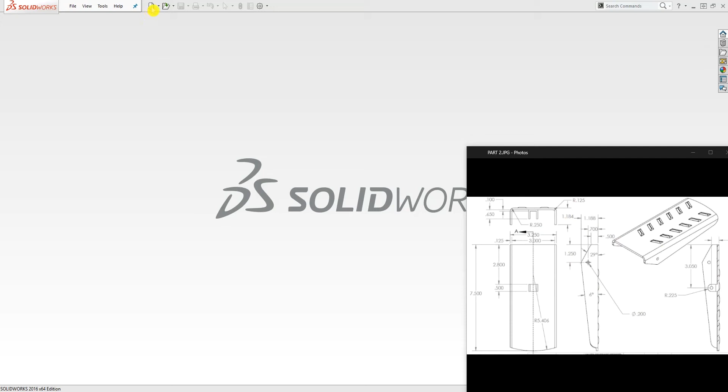Hello, welcome. In this tutorial we'll be making an assembly for a throttle pedal. Someone sent it to me to make it. This is the first part we are going to be making. The dimensions are not complete, but I'll be referencing some of these dimensions, so feel free to follow along.

Instead of modeling this the way the example I saw was done, the person modeled it in sheet metal, and we are going to be using sheet metal to model it so we can bend it and unfold it. To start, click the top plane. I'm just going to move over here. Make sure your unit is in inches, and I'll change my image quality, then click OK.

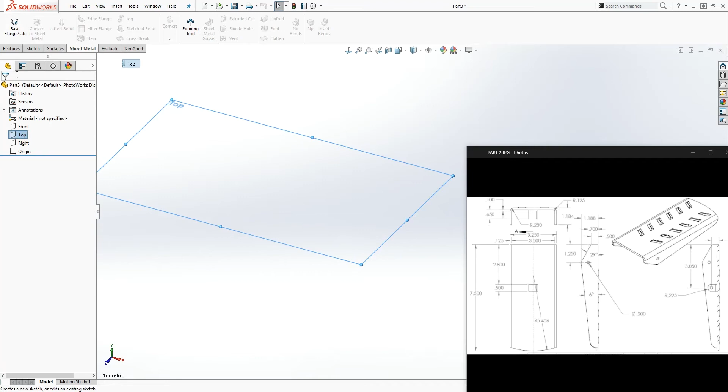On the top plane, click go on the sheet metal tab. If you don't have sheet metal, right click anywhere on the tabs and you should see sheet metal option, make sure that's checked. Select the top plane and select that first tab thing on the sheet metal, and it's going to bring you to a sketch.

So you need a sketch. Let's just draw a corner rectangle, starting up here and going right there, something like that. Then add your dimensions: the length for this is 7.5, and the dimension here is 3.25.

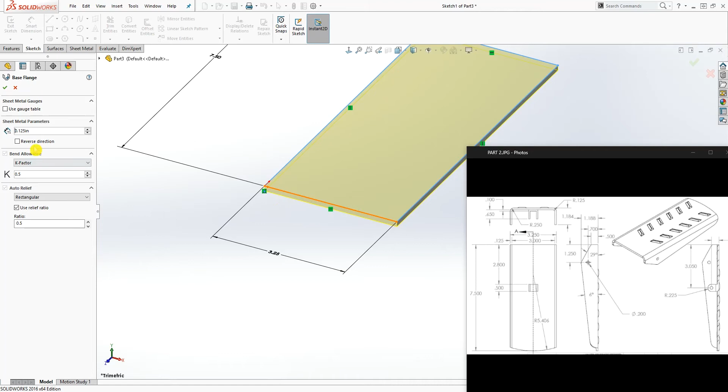Once we have that, you can exit your sketch, and it goes right into the extrude. It's trying to extrude it down, which is exactly what we want. You want it 0.125. You can leave all the other factors the same and click OK.

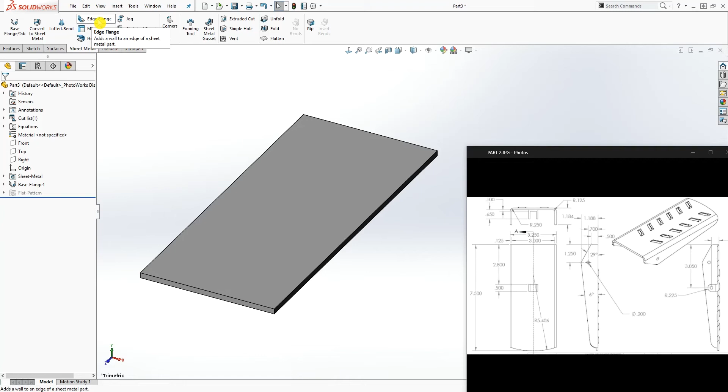Now you've extruded, and the sheet metal tab has been added to these folders. The next thing we need to do is add the edge flange. Click on edge flange, and I'm just going to click on the top face. Make sure you're on the top face - if you click this face, you can see I'm actually on the top face.

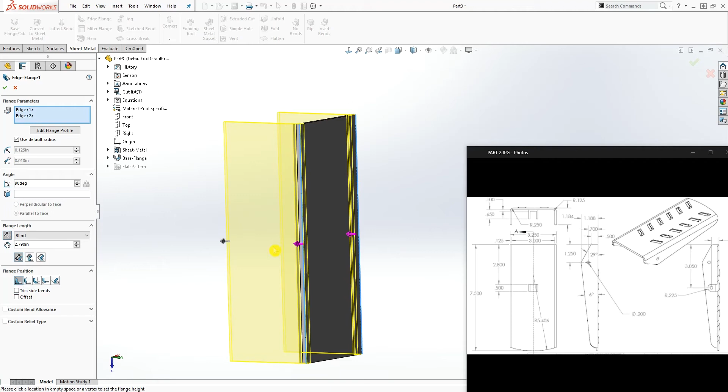Now I need to select two edges to add my flange to. In this flange parameter, select this edge, and again in that flange parameter also select this edge. So we are adding it to those two edges. This stuff is pretty sensitive - make sure you're going in this direction, and once you select the edge, click once in this direction to make sure you're going that way. As you can see, I've clicked, so I'm going in that direction.

You can also change it here, but we want to change this value - if your radius isn't 1.5, over here it's 0.125, you can uncheck this and change it, but mine is 0.125, so that's what I need. Over here, this is going to be 1.1875, that's the unit I want, 1.187. You can see that's short now. Select this first tab, select that first tab. Everything looks good, make sure this is 90, and click OK.

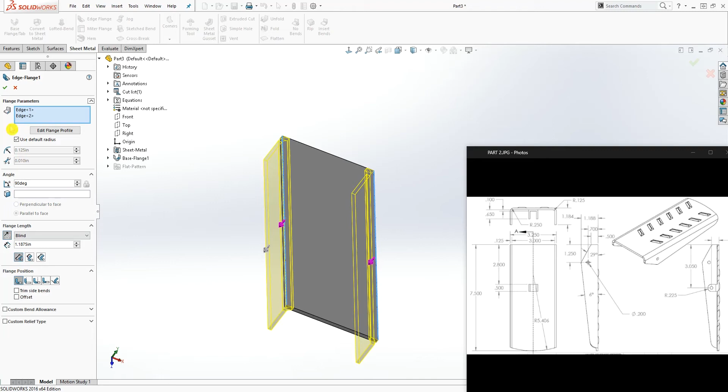Now we have that tab. We are doing this in sheet metal just to show you how to use it. If it was a normal sketch, all we need to do is draw this profile and extrude it, and we'll be done. The good thing about sheet metal is now these folders are here, and if I go down here, I can actually unfold this - you see, it turns into that, and I can also suppress it and it folds back. That's the reason why this is good.

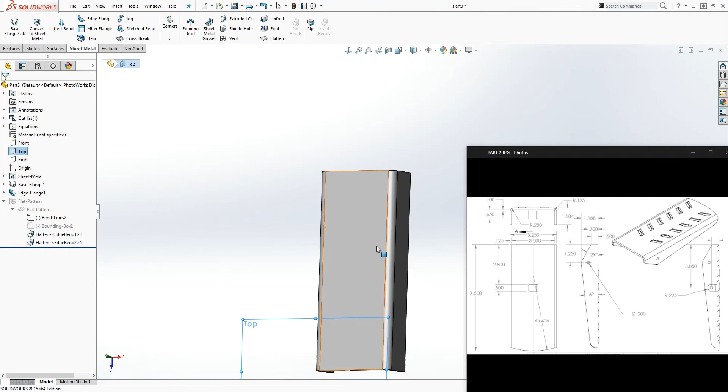Moving on, let me make sure I'm on the top plane. Yes, good, and that is going down good, so that's exactly what we want. Now all we need to do is sketch on this face. I'm just going to draw a line here and there, but let me go normal to it, so I have something like this.

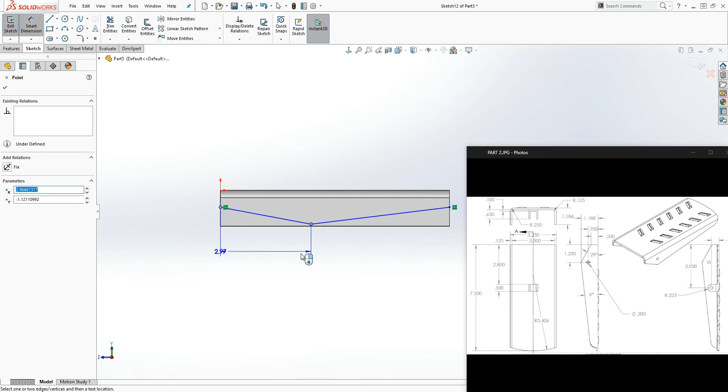Looking at this on the back side, make sure this line is coincident with that, and make sure this line is coincident with that. Now we want to add our dimensions: from here to here is 1.25, and the radius from this edge to that edge is 6, and from this edge to this edge is 0.5, and the radius here is 29.

So from here - not the radius, I mean I probably said radius for that, I mean angle, sorry - the angle is, excuse me, 29. So our sketch is fully defined. All we need to do is close it off, so you can draw a line sticking out.

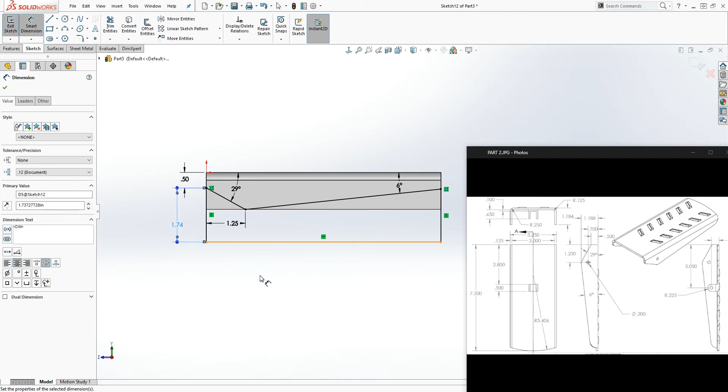So close it off, and let me move this dimension out of the way, and I'm just going to fully define my sketch because I like fully defined. Just add a dimension here to make sure everything is fully defined. Then go to the feature, extrude cut, and you want to extrude through all, and click OK.

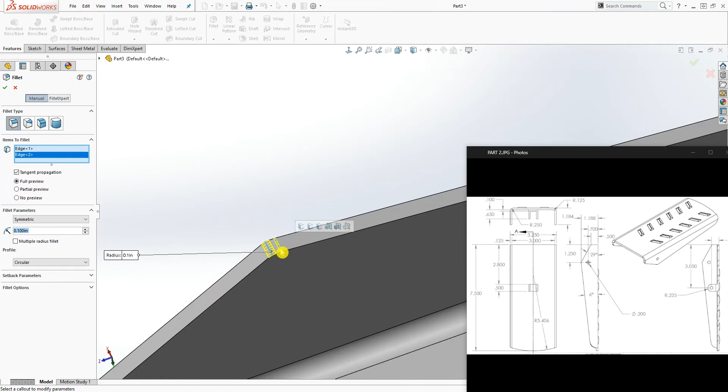Good, so now we have that feature. Now what we can do is add our fillet to this edge and that edge, and the same thing here and here. All, and the fillet is going to be 0.125,

and click OK. So good, that's done. Let me just move my stuff over here because the drawing is in the way. So again, normal to this plane. So we want to draw, cut the part out. So on this face, sketch,

go to your arc, the one I'm using is the 3-point arc. Click this side and click that side and just click up here, so you click in 3 times. Make sure this point and this point is horizontal to each other. Make sure this arc and that edge is tangent to each other.

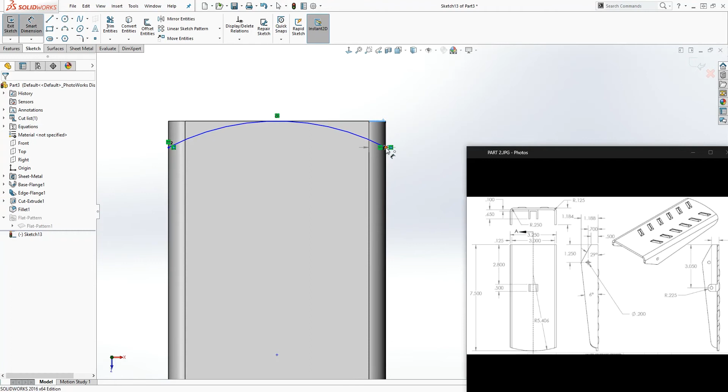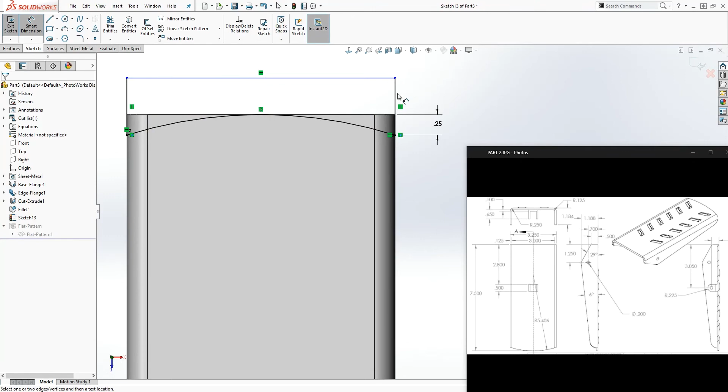So now we can add our dimensions from that point to that point. It is going to be 0.25, and our arc is actually fully defined and we don't really need a radius, so that's all you need. Again, close it off, close your sketch off, just something like that. Make sure this is vertical, and just add a dimension here so everything is fully defined.

And feature, extrude cut, and through all, and click OK. Good, so we have that done. The next thing we want to do is draw that hole in there.

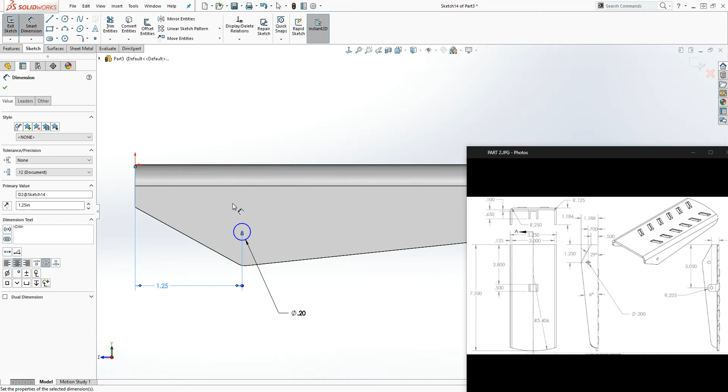So what we are going to do is click on this face, sketch, normal to, just draw a hole somewhere over here. The diameter is 0.2, and the distance is from here to that is 1.25, and the distance from here to here is also 0.5.

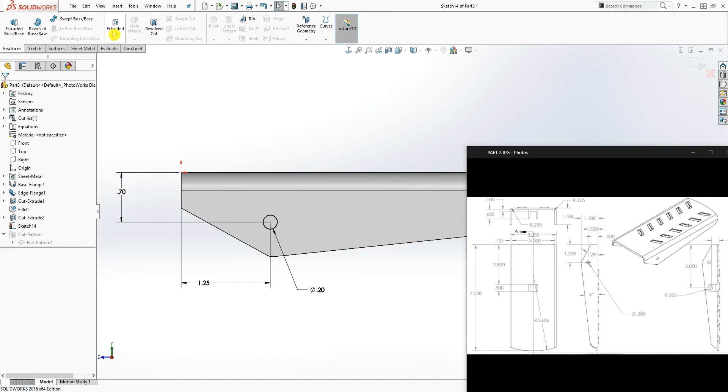So let me make sure everything, not 0.5, I'm sorry, I have it wrong, 0.7. So that is 0.7. So yes, right here 1.25 and 0.7, and feature, extrude cut, blind through all, and click OK. Good, so we have that.

So the next thing we need to do is we can add a radius over here, on this back end, and it's also going to be 0.125. I'm going to add it to this edge as well, and click OK.

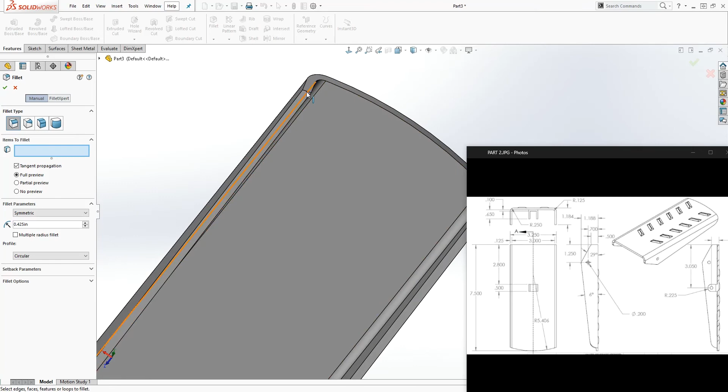And now we need another radius up here, 0.425, and I'm just going to add it to this edge and that edge, and click OK. Good, so we're almost done with this part. You see everything looks pretty good.

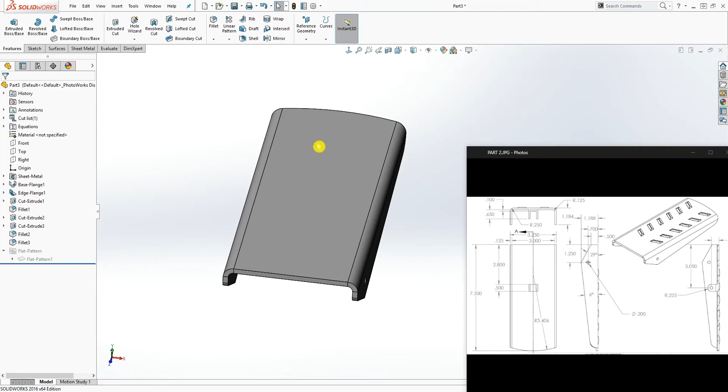So now we need a plane. We need a plane in the middle because the way we start our sketch, our plane is on this side. So one way you can draw a plane in the center is click this face and click that face, and SolidWorks automatically puts a plane in this at the center. That's what we need, and click OK. So now we have the plane in the center.

Click that plane and sketch, number 2. So we have that, and I'm just going to section this so I see what's going on. Now I want to draw, the reason why I did that is I just want to draw this profile straight. I don't want to have to draw the square and cut it. I just want to draw that profile straight.

So I'm just going to draw something like this somewhere. Make sure it's coincident with that. Draw something like that, and draw like a circle here. Make the circle tangent to those lines, and also make the circle tangent to this line. Let me uncheck that tangent.

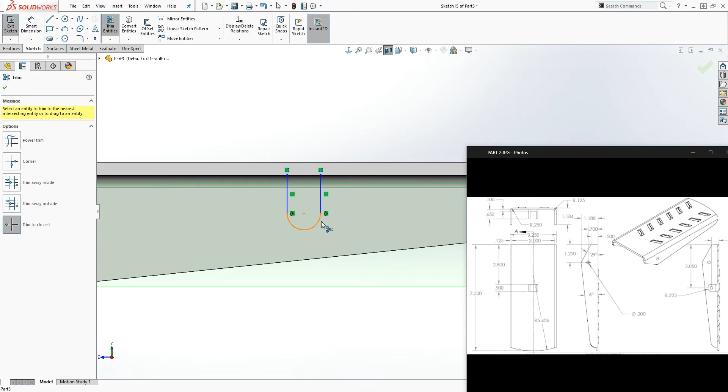Maybe I don't need this line, and I'm just going to trim this off. And the dimension from this face, so you can do the top face to the center line of that, is 5.25. Not 5.25, I'm sorry, 0.525.

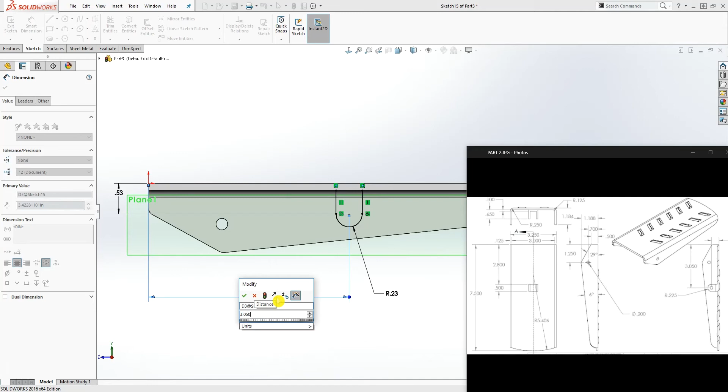I was like, wait a minute, what's going on? And the radius for this circle is 0.225. And we also need one more, so the dimension from the back side to here is 3.050. Click OK. So make sure your sketch is closed, and we are going to draw the circle inside, and the circle in it is 0.2.

Make that 0.2. Our sketch is fully defined. Exit sketch. We have something like that, and I can hide this plane for now. I'm just going to feature extrude this sketch, and I want to extrude it by the mid plane, and it is going to be 0.65.

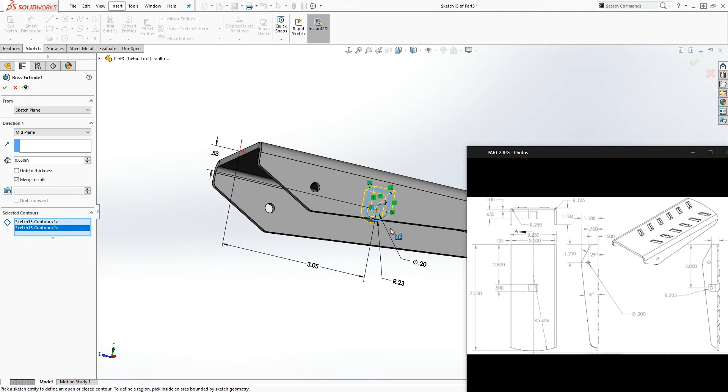If I unsection that, we have that in the middle. Click this plane again. I did that wrong, let me go back. I want to select those two. Let me edit this, and make sure this contour is also selected, and click OK. Now I have that hole in it. That's exactly what I want.

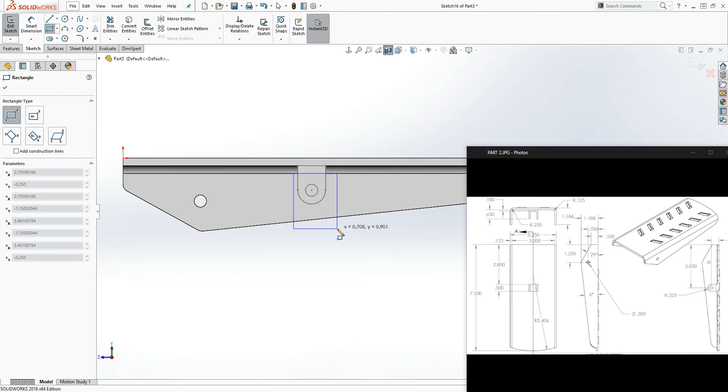Select this plane again, sketch number 2. Now I want to section it again, and I'm going to show this sketch for now, and just draw a rectangle somewhere in here, something like that. It doesn't have to be exact, just make sure it's not coincident with that tangent line, just something in there. And okay.

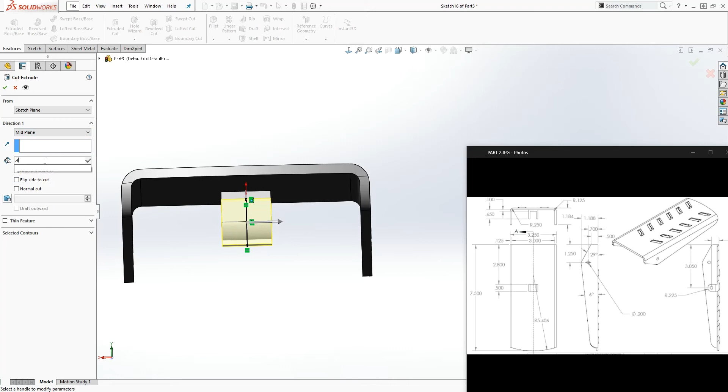Add a dimension from this line to that sketch line, going to be 0.1, and this sketch is sticking out, which is what I want. I can make it coincident with this, coincident with that, and I want it sticking out, and add a dimension here, 0.6 is good. So I have something like that sticking out, and now I want to feature extrude cut by the mid plane, and it is going to be 0.45. Something like that, click OK.

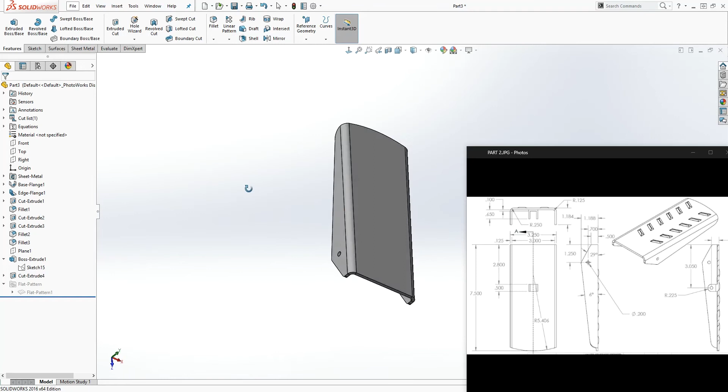Good. So we have that, and now I can just hide this sketch, and this part is pretty much almost done. The only thing we need now is those designs on the top. Click on the top face, sketch, draw just something like this for now.

Draw a center line. If you click, because this part is pretty much the same distance, that's pretty much the center line. I'm just going to draw a line over there and make it a construction line. Now add my dimension from here to here is 2. This is 15. No, it's 115.

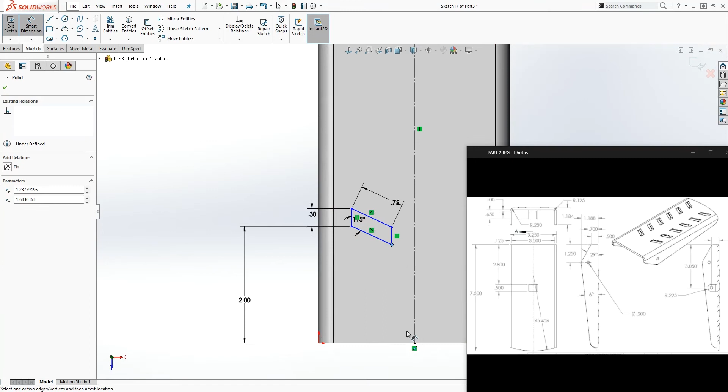This line and this line are parallel to each other, and from here the dimension for this is 0.3, and the dimension here, going this way, is 0.75. We just need to specify the distance. For now this doesn't really matter, so we can just do a dimension from here to here, and let's make it 0.38. So you should have something like that.

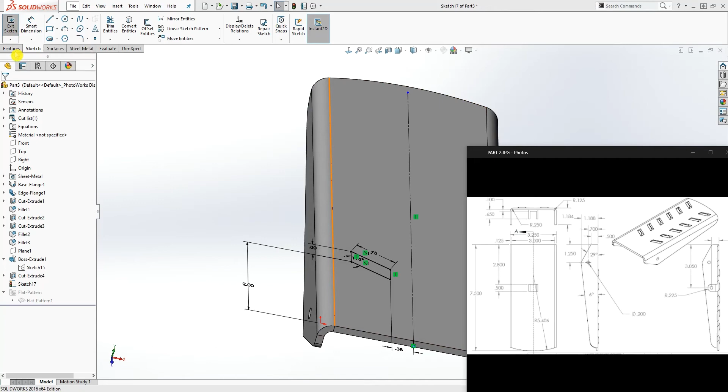Once you are done, we are going to extrude it. I'm going to exit the sketch, or even before I exit the sketch, I can just go into feature, extrude. So I'm extruding that up, and it is going to be 0.05 inches, not centimeters. Then select your draft, and this is going to be 68. If I zoom in, you should see 68, and click OK.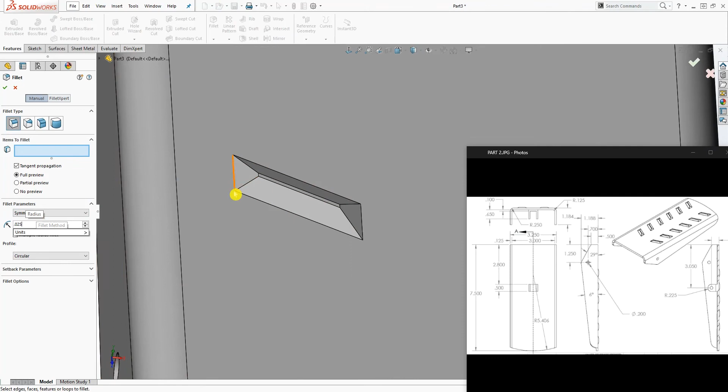And you have that pattern. The next thing we're going to do is add a fillet to it. Click on the fillet, and it's going to be 0.025. I click on that face, that face, that face, and that face. So I have my fillet. Click OK.

Good, so now all we need to do is just go number 2, add a linear pattern. For the direction, we can select this edge and flip it so it's going in that direction. The number is 6.

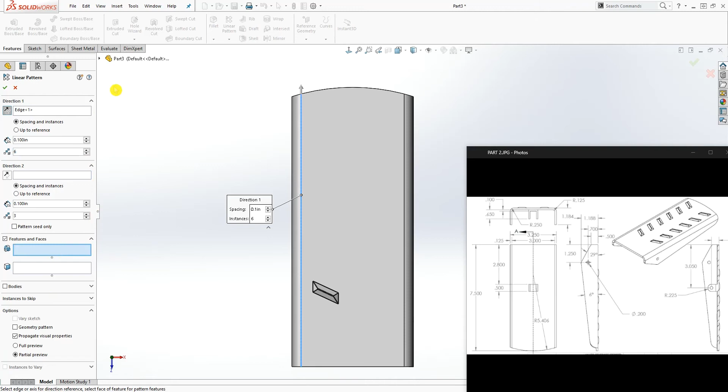We have that feature, and the next thing we need to do is just mirror it over. So mirror on that plane we made in the center, that feature, make sure the linear pattern feature is selected, and click OK.

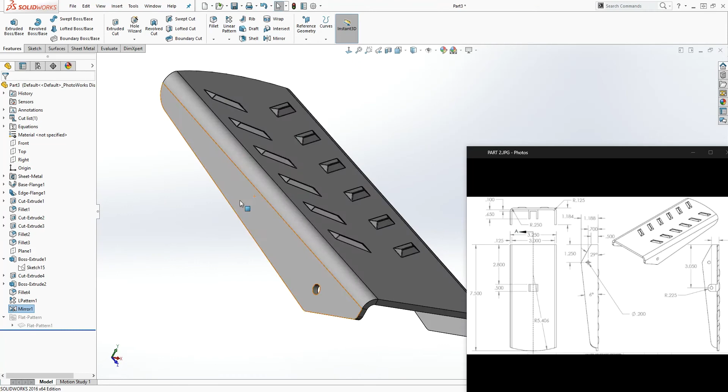And there you go, we are done with this first part of our assembly. So the good thing, I know this took a while, and the reason why I wanted to show you this sheet metal way is now we have this part.

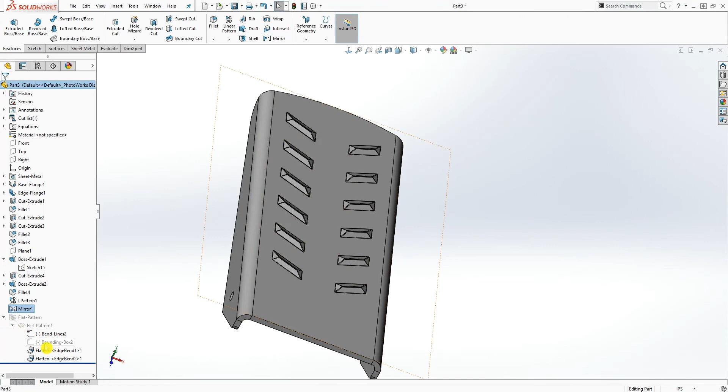Let me just minimize this for a second, and if I go down here and unsuppress that, you can see it actually flattens it, and if I suppress it again, we have that. So save this somewhere.

I'm going to save on my desktop and just name it part 1. So name it part 1 and save. So moving on to the next one.

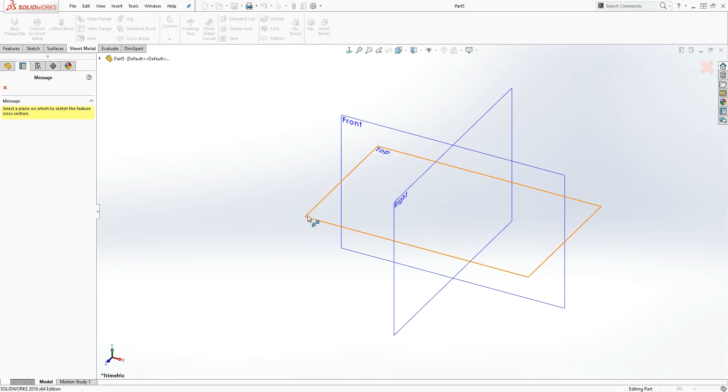So start a new part file, and again make sure your unit is in inches. Mine should be okay. Click OK. So now again on the sheet metal, this base, now we want to select the top plane.

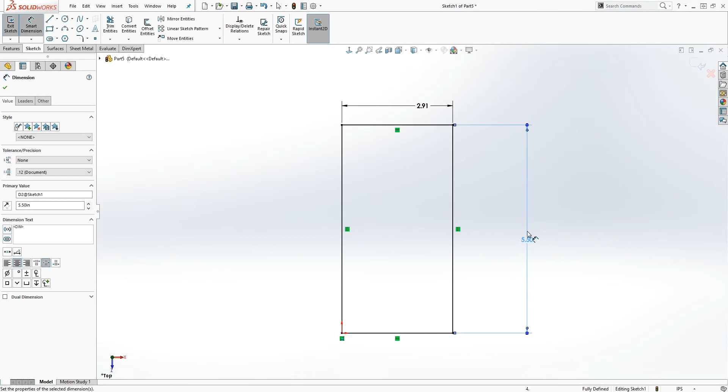So I'm just going to draw another sketch, something like that, and this dimension is going to be 2.91 and this is going to be 5.5. So we have that. Exit sketch, and again we have extruding it 0.125, that's what we want. Click OK, and now click on the top face and go normal to.

So while we are looking at it from the top face, we want to not select the plane, so unselect the plane, I'm just going to exit that. So edge flange, and while you click on your edge flange, we want to, and while we are in here.

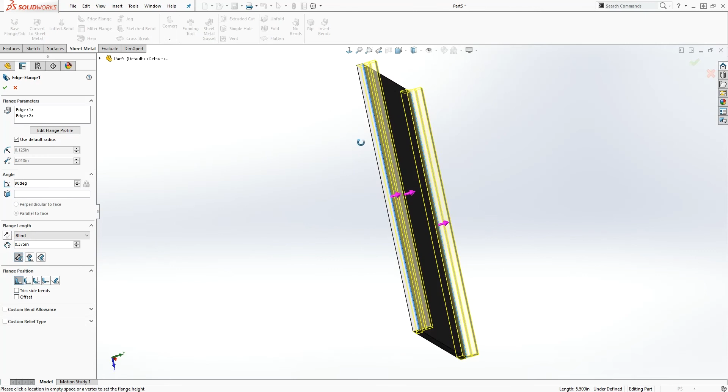Select this top edge, select that edge, you get in this profile again and select this edge, and I'm just going to move it somewhere there and click here, so just to lock it. So now that it's locked, I can now change my parameters in here.

Everything looks good except for I'm going to change my distance to 1.125. So make sure this tab and that tab is selected, everything looks good, and click OK. So that's what we want.

And I have a drawing for it, so I'm just going to show my drawings again, and it's this drawing. So I know there's a lot going on, but just follow with me. So now the next thing we need to do is cut the stuff on the side.

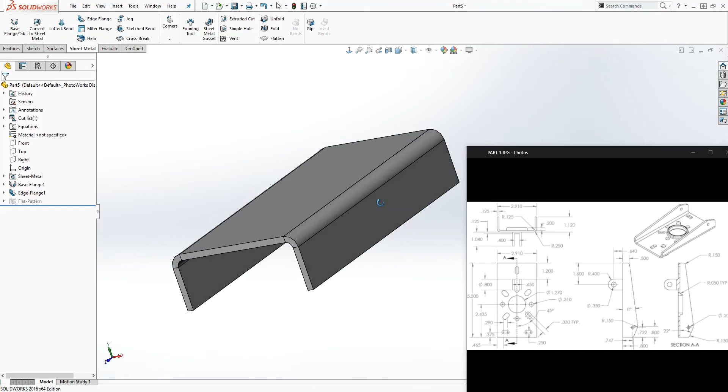So click this face, sketch, and I'm going to just draw a line there and there. I'm going normal to, so move it somewhere over here.

From here to here it's going to be 0.5. From here, so this circle, from here to here is going to be 0.8, and this is going to be 21 degrees the angle.

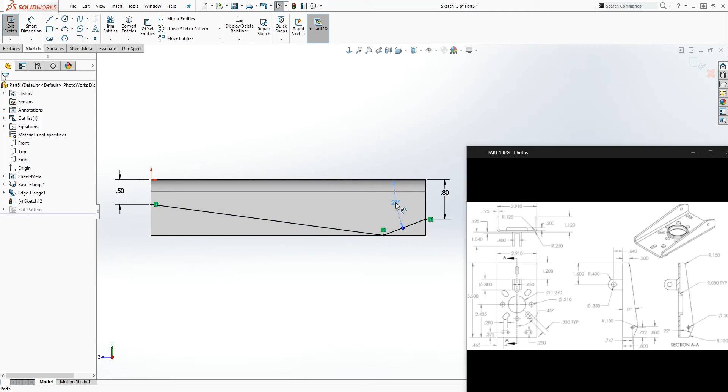And I'll just move this back, make sure this line, that point is coincident with that. So 21, this point shouldn't be coincident with that, so from here to here it should be 0.8. So it should be that. So you should have 0.8, 0.8, 0.8, 0.8, 21.

No, this is actually, let's change this to 21.11, which is still 21. And now I'm just going to close my sketch. And I'm just going to add a dimension to fully define it. And that was good, so that's what I have.

Feature, extrude cut, select that sketch, through all, and click OK. So we have that. So the next thing we need to do is cut a hole.

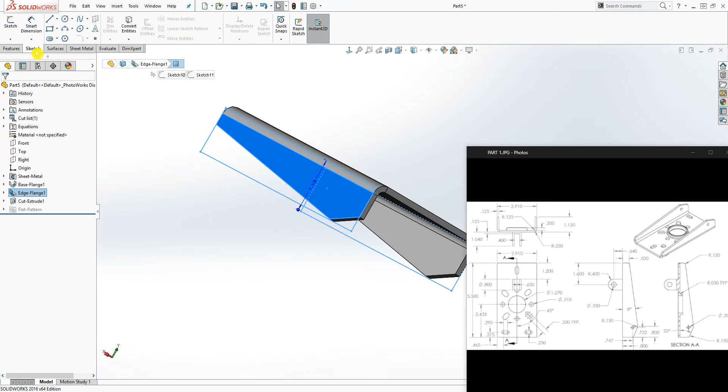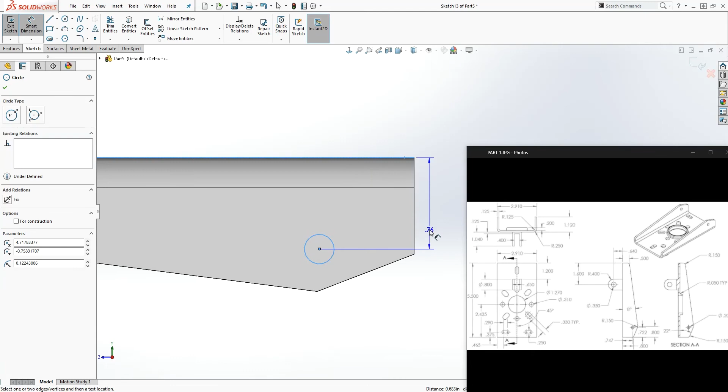So we click on this face, sketch, normal to, just going to bring it up somewhere up here. I'm going to draw a circle somewhere in here, and the dimension I'm referencing is over here. So from this back edge to the circle is 0.747, and from this center point to that is 0.722.

And as you can see it's right here. Let me make sure that I'm referencing it right. Let me move this back here. No, I don't want to do that, and I need a radius for my circle.

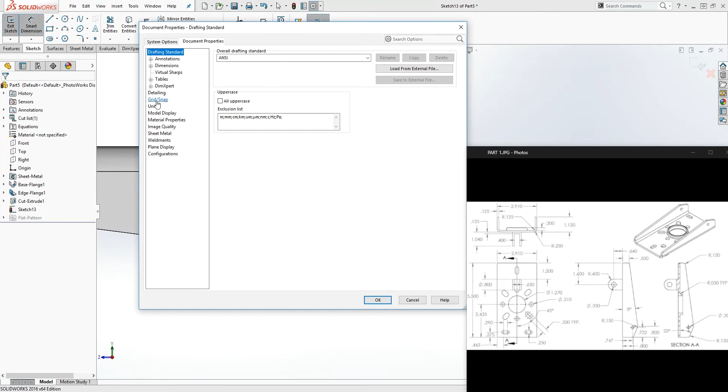Diameter, the dimension is 2, so make that 2. No, not 2, 0.2. So 0.2, and let me change my units to 3. It isn't 3, not sure what's going on. Why do I keep clicking help? So alright, I'll figure what's going on later.

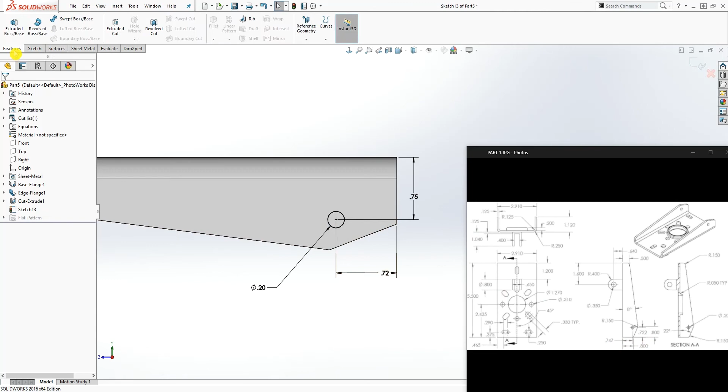So make sure you have this dimension, and you can reference it here, 0.72 and 0.747, and I'm just going to click feature, extrude cut, blind, through all, and click OK. Good. So now we are going to draw, cut this circle in the center.

So click on this face, sketch, normal to. We just draw a circle somewhere over here, and I'm going to draw a line, this yellow thing means that's the center line. So I'm just going to draw a line from there to that circle, make that line a construction line, and I'm going to add a dimension from here to here. It is going to be 2.435.

I'm just making sure... see, I did that wrong. Oops, let me delete this. That dimension should be from this edge, this top edge.

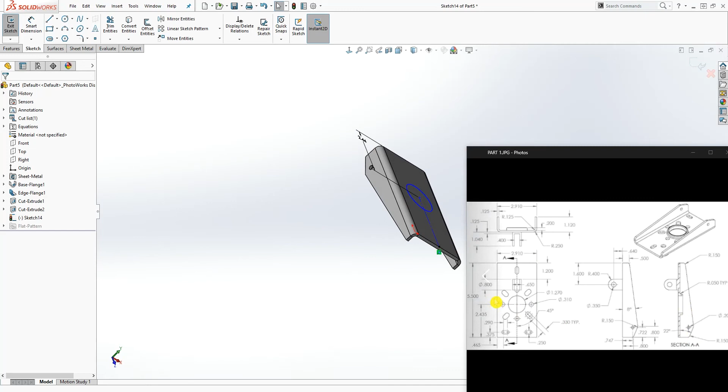So if I go normal to, from this edge to there, that should be 2.435. As you can see, it is over here, and it's apparent over here, so it is 2.435.

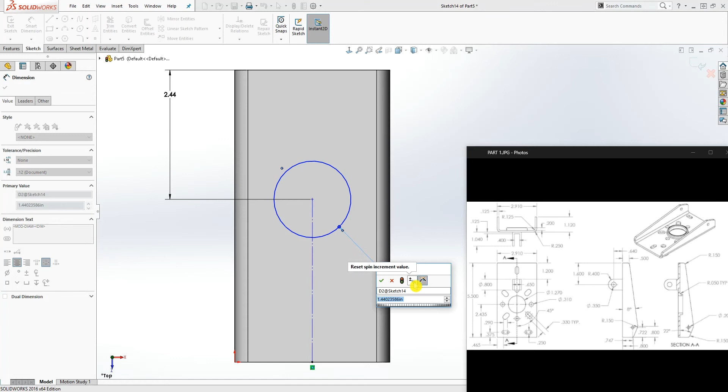Now I'm just going to feature, extrude cut up to next, and click OK. Good. So click on this face again, and draw a sketch.

Number 2, again my top part is up there, so I'm just making sure. Number 2, I'm going to bring it over here, and now I'm going to draw like a center straight slot, something like that.

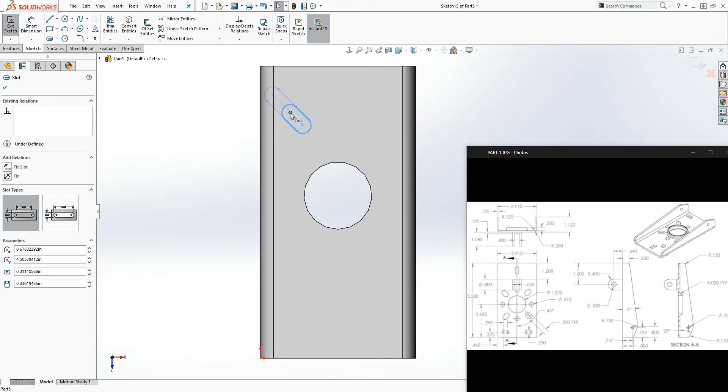I'm going to bring it over here, and I will show the sketch for this for now, so that way I can just pick that point and draw another line that I'm going to use as a reference. As you can see, from here to here, the angle here is 45.

This slot is 0.25, and the distance of that center line is 0.29. So that's how long it is.

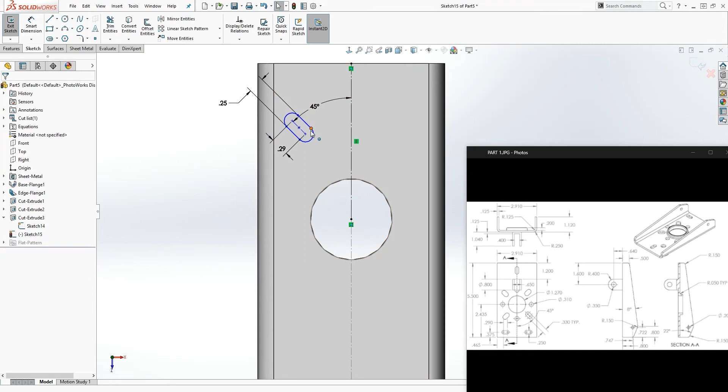Then we need to just find, so this is not really critical, so you can just kind of bring it somewhere over here, and I can just add a dimension from here to here and from here to here, just to fully define it.

So I'm just trying to draw this pattern, and maybe this, I can make this 0.5. Try and see something that's close.

That seems close, so the next thing I would do is just draw the second one, this circle, and that circle seems to be somewhere over here, and it is coincident with the center point of this, so I can just match that vertically and horizontally, and this is going to be 0.31.

All I need is the distance, let me try that and see where... yeah, that seems to work. So just make the distance coincident with the vertical with this point and that line vertical. So my sketch is fully defined.

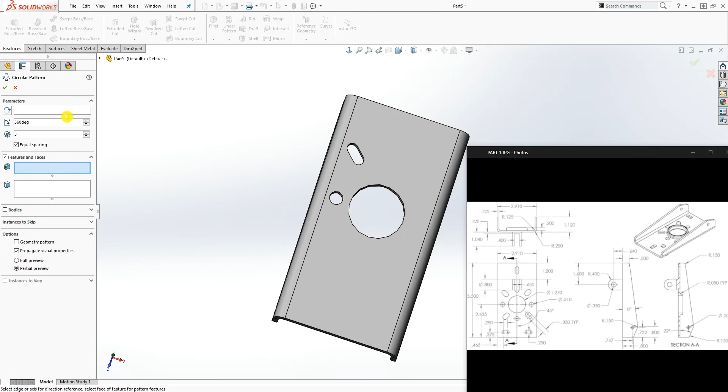I'm going to feature, extrude cut, blind up to next, and I have that. What I can do is actually click on this circular pattern, the circle, I select that edge. Let me hide my sketch because the sketch is not needed. So circular pattern, in the parameters I'll select this edge, and the feature I'll select my extrude cut.

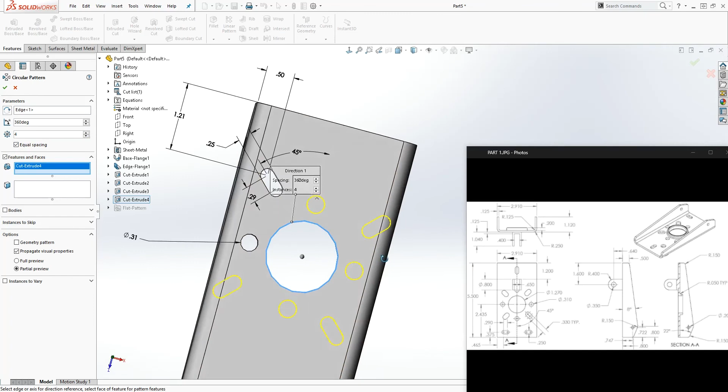And how many times, let me just show you what's going on. So I'm going to pattern it 4 times, and I realize what I did wrong, which is okay.

So what I would do now is I'll still pattern it 4 times, because this cut is wrong, the slot cut is wrong. So what I would do is the circle is right, I need that 4 times. So on this extrude cut, and it's good that I'm doing this, so that sometimes, because you'll model something and the idea you have is wrong, so you can kind of fix it.

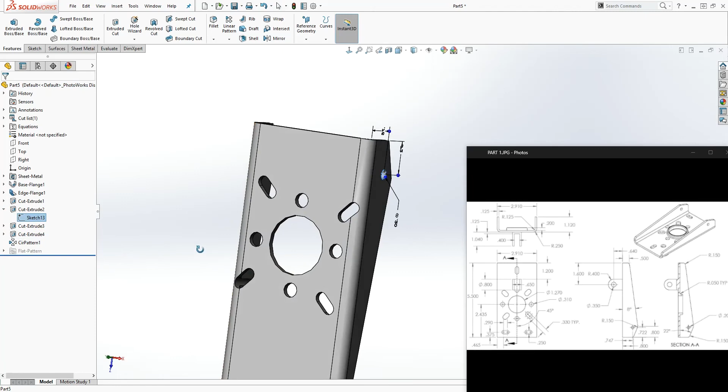Which is what I like about SolidWorks. So this cut, I'm just going to go back into that, edit that sketch, and I'm just going to use this green thing to select this whole sketch and make it... I guess I can't do that because I'm selecting.

So select that, and where is my... so I can't make it a construction line, so never mind.

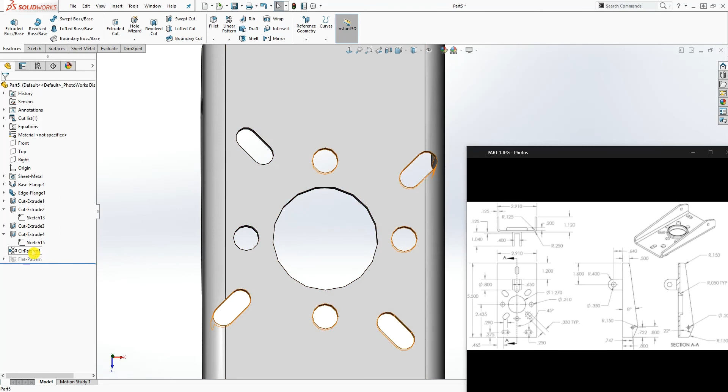I guess I'm going to have to delete this and edit this sketch and make this a construction line, the circle a construction line. We'll use it later. So go back, and I apologize for that, go back.

So I'm trying to figure out the best way to do this. I know what to do. So draw a line over here and make this line a construction line.

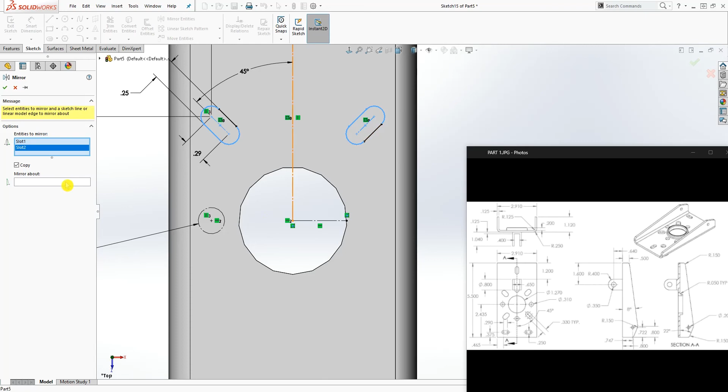So now I'm going to mirror entities, and entities to mirror, I'm going to select the slot about, mirror it about this line, and click OK. Again, I'm going to select mirror entity, entities to mirror this and that about this line, and click OK.

And that's exactly what I want, now I'm just going to exit that, so I have it in the right place. So the next thing I need to do is click on that face, sketch, and because I already have my... yes, because I'm going to show that sketch, number 2.

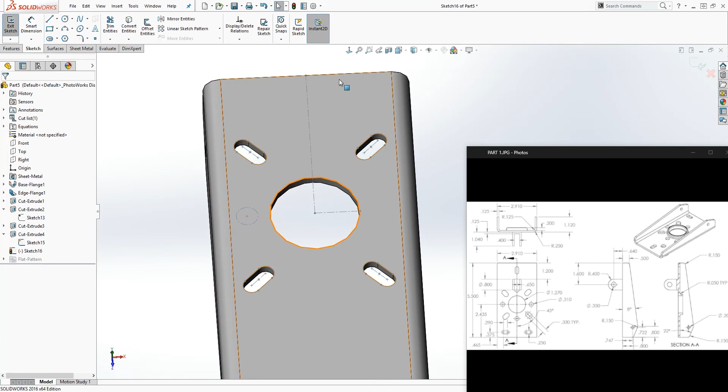Then this circle, I'm just going to convert entity, and I can hide that sketch now because I don't need it. Then feature, extrude cut, up to next. What am I doing?

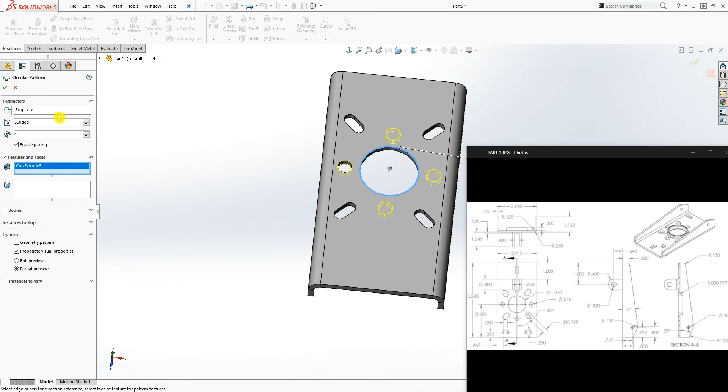Up to next, and click OK. Now I can mirror this 4 times. So I'm going to do, not mirror, circular pattern 4 times, parameter, that edge, feature, select this face, 4 equal spacing, and click OK.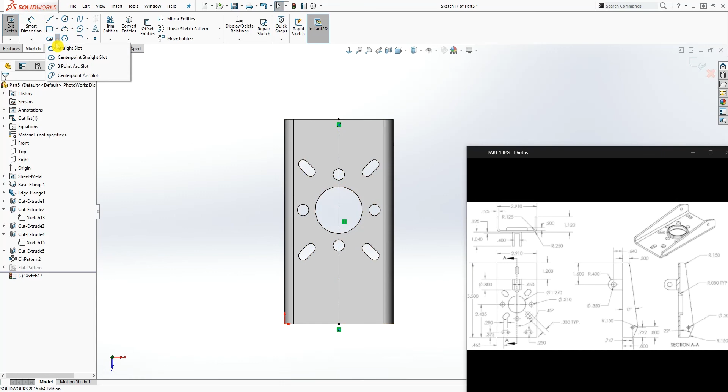Click on this face again, sketch, normal to. We're just going to draw one more pattern. So again, line, hover over here, you should see this center point. Let's draw a center line somewhere over there and make this a construction line. And I'm going to draw another center slot, something over here, and move it this way, and move this somewhere over there.

I'm just going to add a dimension to it, and it is going to be 0.29. And from here to here, I'm going to make that 0.375. And from here to here, this point is going to be 0.465, and this is 0.25.

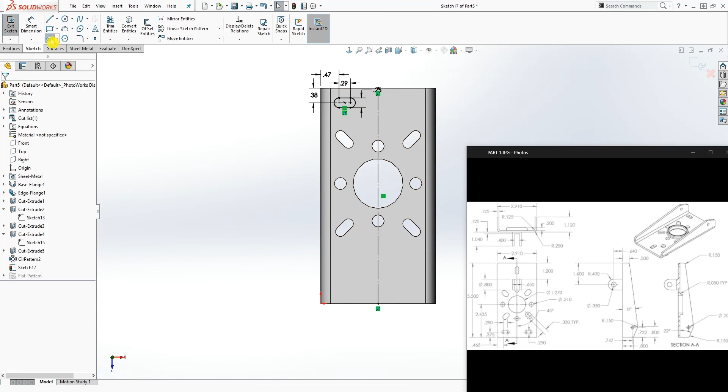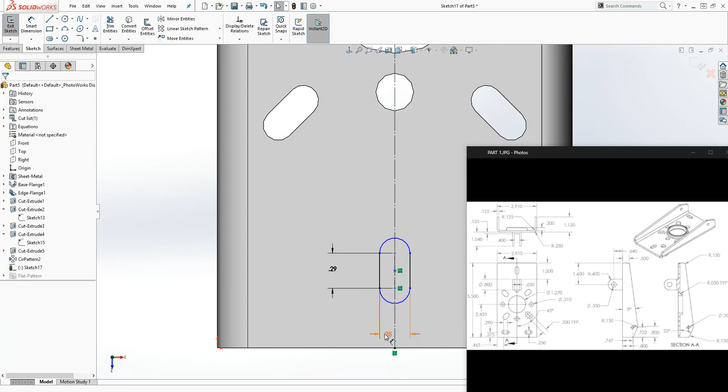So that's what we have, and I need the same thing up here. So I'm just going to draw one like that. I can move this back a little bit. It needs to be kind of like the same as that one, so I'm just going to make that line, this line, this point to that point, 0.29. Yes, 0.29. This is 0.25, and from here to here it is going to be 0.5. Let's try 0.5. That looks good.

And this, I'm just going to mirror this over. So mirror entity, mirror about this line. Click OK. Good. So now all we need to do is extrude cut, up to next, click OK.

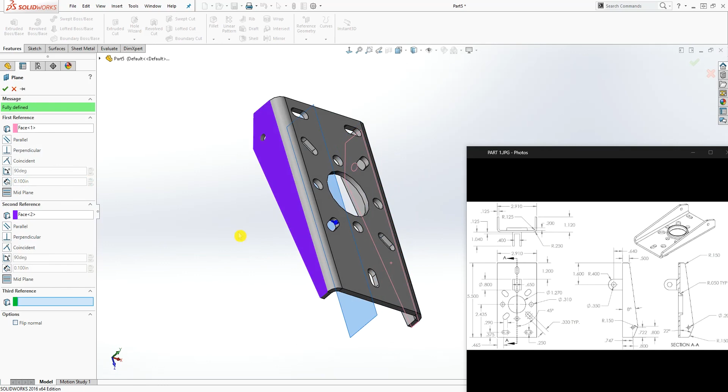So we have the patterns we want. The next thing we need to do is, again, let's draw a midpoint, mid plane. Select this face and select this face, click OK. So we have our plane, select that plane and sketch, normal to.

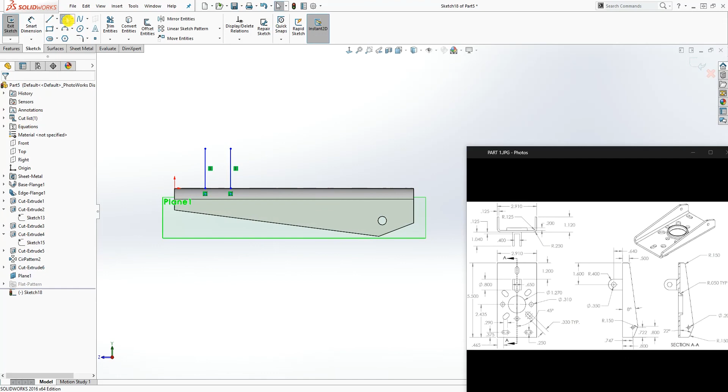So I have something like that, which is this. Now I just need to add my dimension. So from this face to that center line is 0.64, and from this edge to that center line is 1.6.

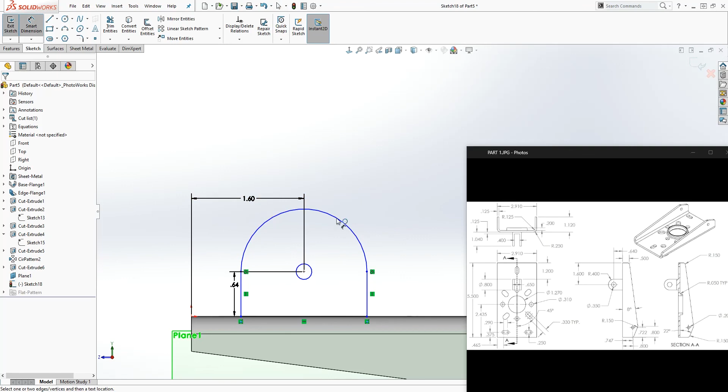That's okay, we're going to fix it. So 1.6, and the radius for this is 0.4. So it's 0.4, brings that close, and this is 0.35. Yes. So everything is fully defined.

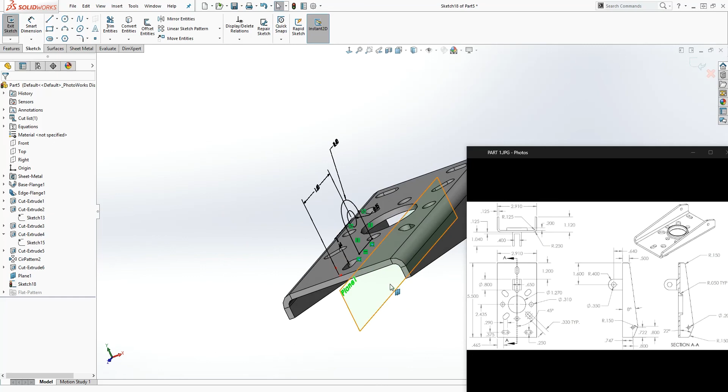There you have it. We are going to feature extrude by the mid plane, and it is going to be 0.65. Click OK.

So we have that extrude 0.65. Then we select that plane again. Sketch, normal to, just going to move it here. I'm going to draw just kind of like a rectangle, something like that. I'm going to show this sketch of this, so I see what I'm doing.

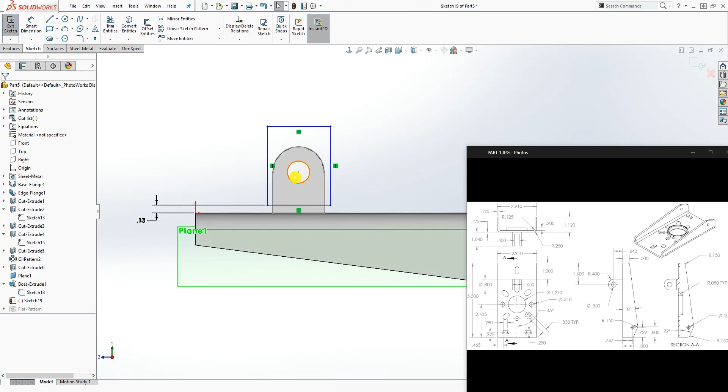Dimension from here to here is going to be 1.120, and I'm going to make this coincident with that, and just add a dimension to fully define it. So I have that, something like that. Hide the sketch. Feature extrude cut about the mid plane, and it's going to be 0.4, click OK.

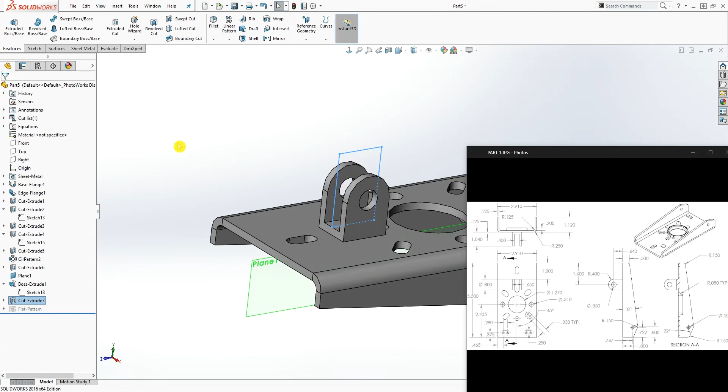Good, so we have that. Now we want to hide this plane, click on this face, sketch, number 2. This edge, I'm just going to convert entity, and draw another sketch, diameter, and the diameter is going to be 1.52, feature extrude, extruded 0.2, click OK.

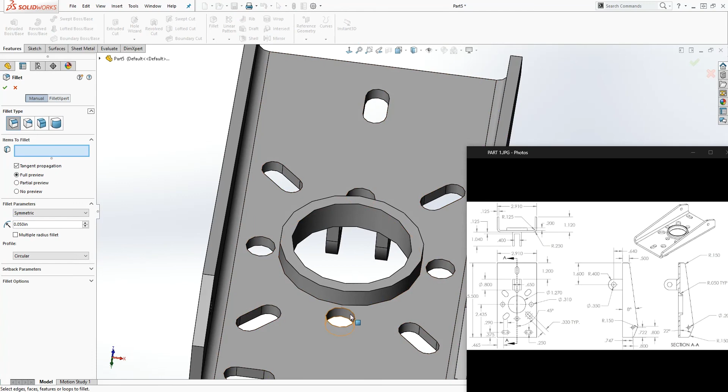So we have that. Now all we need to do is add fillet. Fillet 0.05, and I want to add it over there, this edge, that edge, and this back edge, and click OK.

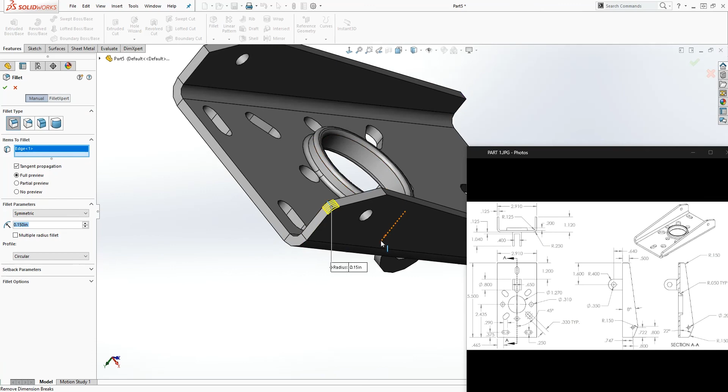And we also need another fillet, 0.15, and we want to add it over here, here, here, and the same thing on this side, here, here, and there, and click OK. And we are done with this part.

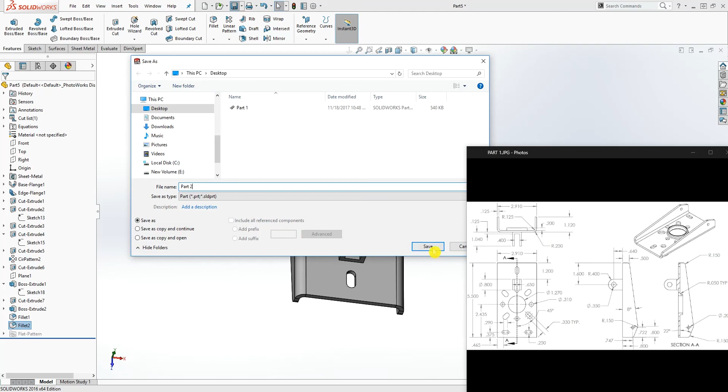Again, I wanted to show you the sheet metal way, because you can bend it, and you can flatten it. So save this part, save it as part 2, and click OK. Save, and we are moving on to the next one.